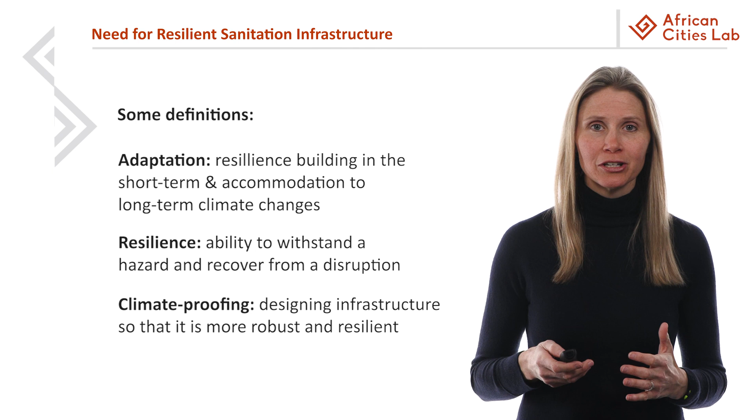Also in this module, I will refer to climate proofing of sanitation infrastructure. The term climate proofing means designing infrastructure so that it is more robust and resilient and can withstand the impacts of climate change shown in video 1. In this video, I will be speaking about different strategies to increase resilience of sanitation systems.

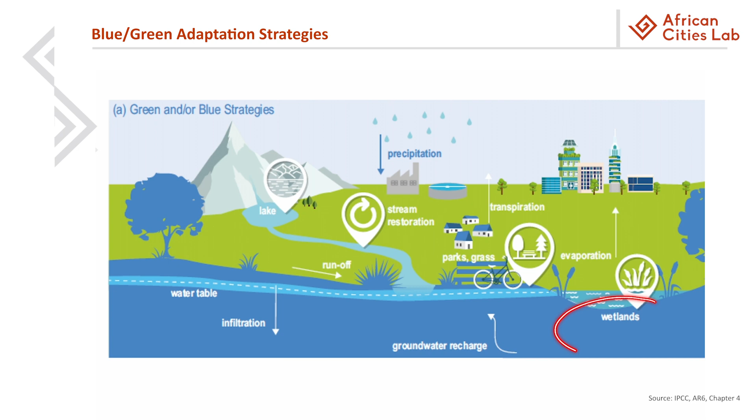As you can see in this figure, blue or green strategies refer to leaving processes as natural as possible. Here, groundwater is left to infiltrate into the soil without construction of impervious surfaces. Natural wetlands can be used for treatment. In contrast, gray strategies refer to pure engineering solutions, such as installing storm drains and installing protected, lined storage basins or septic tanks. These solutions are man-made and try to be stronger than nature rather than mimic it.

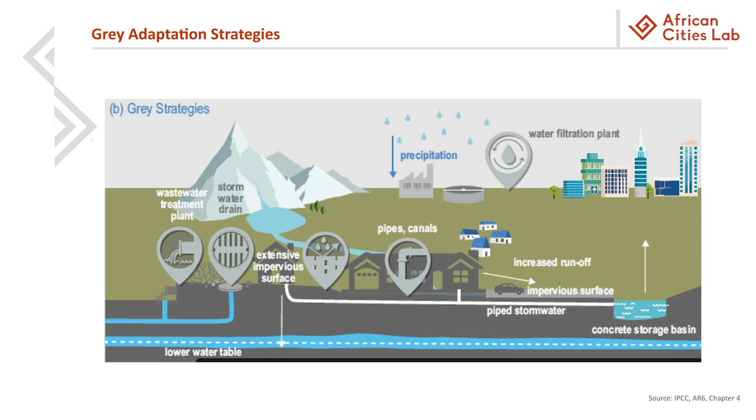In cities, often a hybrid approach is preferred where some elements of the design are left to be natural and others require some engineered climate proofing. Here, one can imagine that porous pavement materials are installed. Also, constructed wetlands can be used to treat waste or storm water.

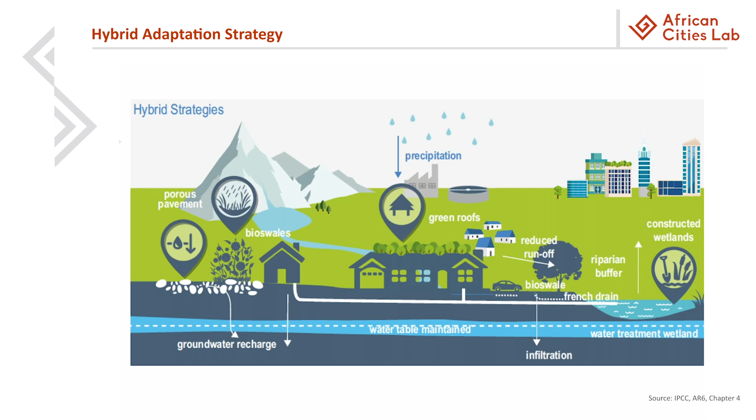According to the Intergovernmental Panel on Climate Change's 6th assessment report, a hybrid approach of combining green, blue, and gray adaptation strategies is recommended, particularly for urban environments. Ecosystem functions can be complemented with engineering infrastructure. The idea is to have sanitation solutions as natural but also as robust as possible.

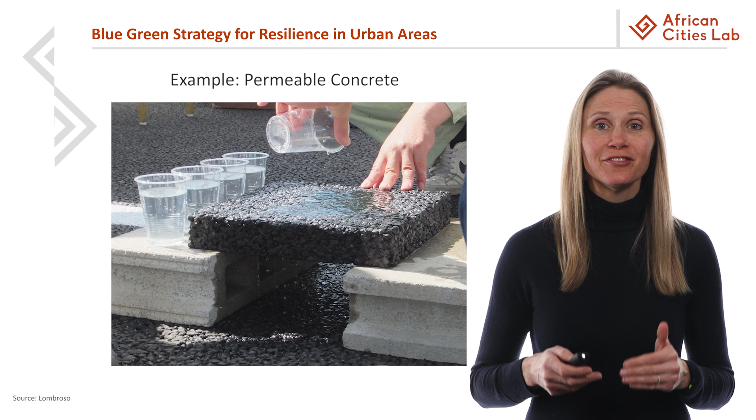In fact, I have an exciting challenge for you. Can you imagine your world with more resilient urban systems? By planning properly with a hybrid approach, it should be possible to integrate sanitation solutions to complement drainage, solid waste treatment, and energy production. I welcome your ideas in our MOOC's discussion forum.

The permeable concrete example previously shown is also categorized as a nature-based solution. These solutions leverage nature cost-effectively. They simultaneously provide environmental, social, and economic benefits and enable a shift away from unsustainable infrastructure.

Here is another nature-based solution example. Living Smiles are natural porous fences made of flexible plant cuttings that are installed to capture runoff and retain suspended sediment. Living Smiles reduce flood runoff speeds upstream of infrastructure. Here we can speak of any sanitation infrastructure. In the best of cases, Living Smiles can also enable infiltration to capture surface runoff.

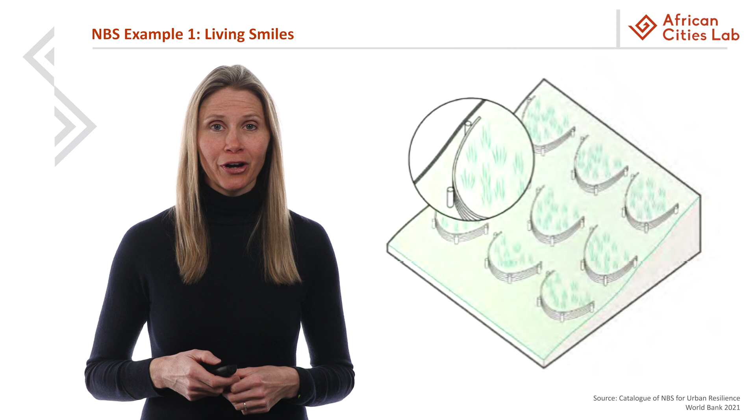Rainwater harvesting is the action of capturing rainfall in a basin or tank so that it can be stored and used for later purposes. The tanks typically capture water that flows into drainage pipes from rooftops. In sanitation, this untreated water has an immediate use in flush-based toilets. Elevated tanks have the benefit that the rainwater can be used by gravity.

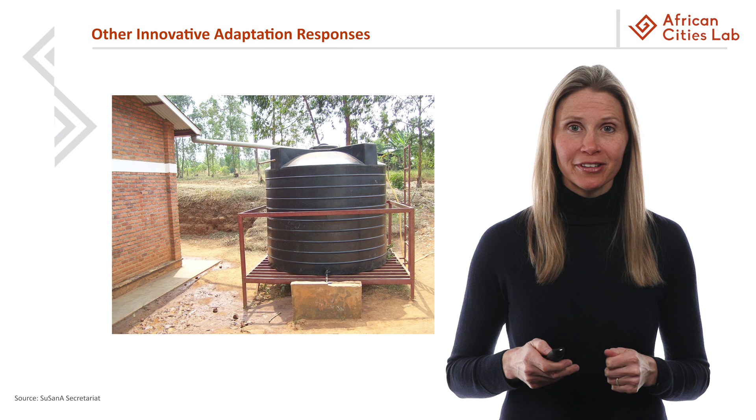Some more innovative adaptation responses for more resilient sanitation include installing water and energy savings devices, applying mapping and flood forecasting tools to predict flood impacts and enable mitigation measures, using smart grid power sources, backups, and sensors to reduce loads on energy distribution systems and to have energy when there are power shortages.

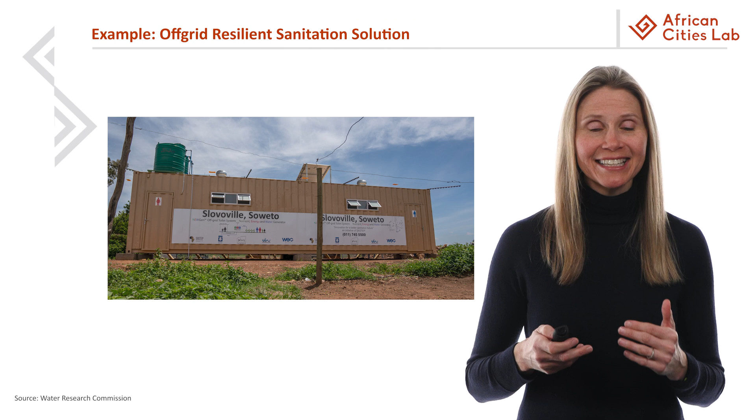Furthermore, as you can see in this off-grid solution in Soweto, off-grid means that a system can be more self-sufficient and not reliant on a country's energy distribution system. Off-grid systems are perfect examples of resilient solutions.

This video showed you that climate adaptation considers more long-term impacts while resilience refers to the short term. We interchange these terms since we are seeking to make sanitation systems resilient in the short and long term. You have seen blue or green versus gray strategies of resilience. They can be considered to be natural versus man-made. Within your urban environments, a hybrid approach is often the only approach to keep sanitation systems secure. The use of nature-based solutions mimics nature to build the resilience of sanitation systems cost-effectively.

So what else can build resilience? We also saw that simply an off-grid sanitation system can help build resilience by being less prone to grid power shortages.

Now I want to hear from you. Have you seen a sanitation system that has been made more resilient? Please share your impressions and any photos on the discussion forum.